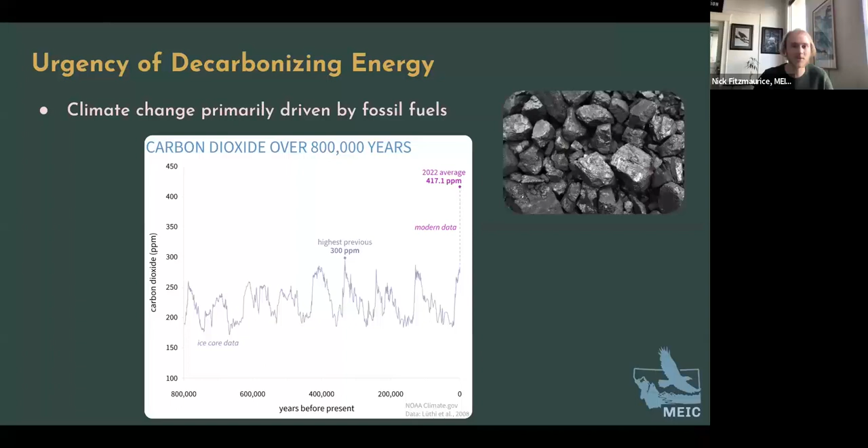So to start off, I want to talk about the urgency of decarbonizing our energy. As I'm sure everyone on this call is aware, we are in a climate crisis. We have unprecedented levels of carbon dioxide and other greenhouse gases in our atmosphere that are causing warming like we haven't seen at this rate in human history. And the primary driver of these greenhouse gases in the atmosphere are fossil fuels, specifically as burned for energy. But the exciting news is that we have technology readily available to switch out those fossil fuel energy sources while continuing to keep the lights on and keep a robust and reliable energy system. And that's what we're going to be looking at here today.

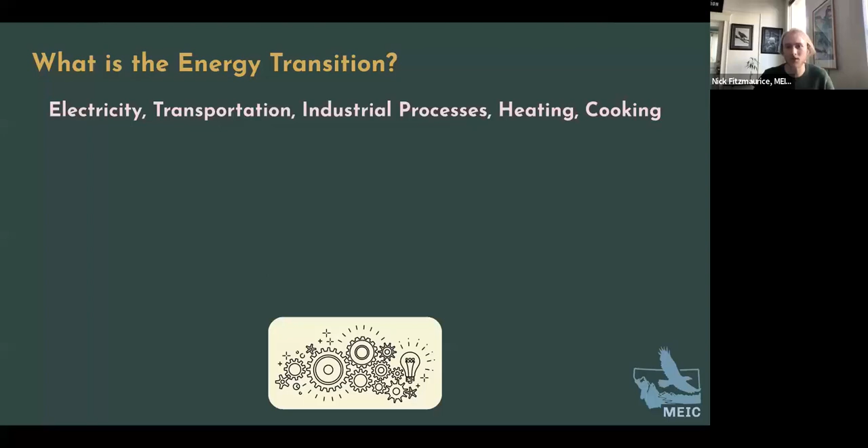So more specifically, what are we transitioning? On a broad level, there are a number of different parts of our energy system. We have our electricity, our electric grid, the transportation that's mostly on our highways and driving cars, industrial processes, and then residential and commercial heating and cooking. Currently, there are carbon-free sources in there, but we're very heavily reliant on fossil fuels of coal, methane gas, and petroleum to fulfill those needs. And what we're transitioning is fulfilling all those same functions, but with carbon-free renewable energy sources, and looking further into how we do that effectively.

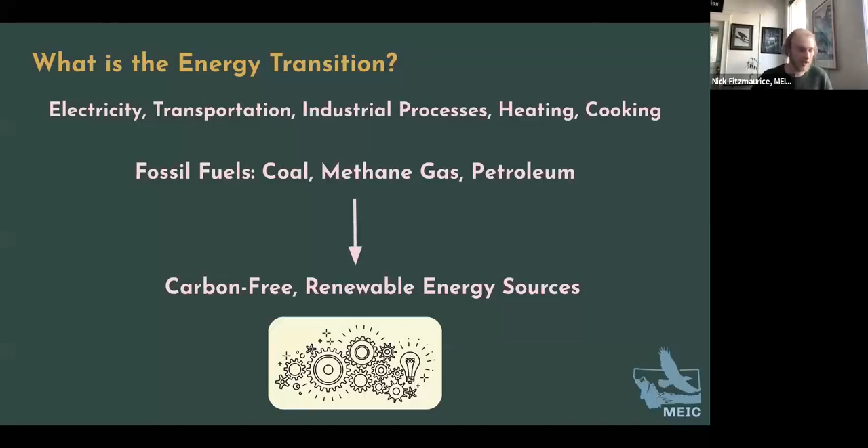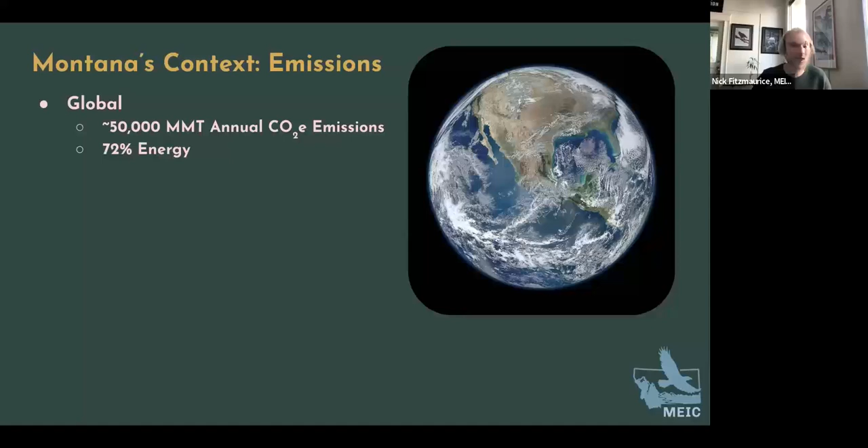I want to talk about where Montana fits into the context of climate change and greenhouse gas emissions. From a global perspective, this number is really hard to pin down, but anthropogenic greenhouse gas emissions, CO2 equivalent, is around 50 gigatons or 50,000 million metric tons every year. Estimates vary depending on how you do the calculation, but about 72% of those emissions are associated with energy.

If you look at the United States in particular, this graphic from the EPA shows point source emissions over, I believe, 25,000 metric tons annually. This shows the United States, by the EPA's estimate, has about 6 gigatons or over 6,000 million metric tons annually, and that percentage is also around 73% from energy.

Then Montana, if you go by the EPA's estimates, our slice of that is about 50 million metric tons, and being a more sparsely populated state, about 63% of that is energy. There's a big agricultural component.

But if you look deeper into the numbers, you have to realize that Montana also has influence regionally, nationally, as well as internationally, as an exporter of both electric power and also those fossil fuels of coal, methane gas, and petroleum, as was explored in expert testimony at this summer's Held v. Montana trial.

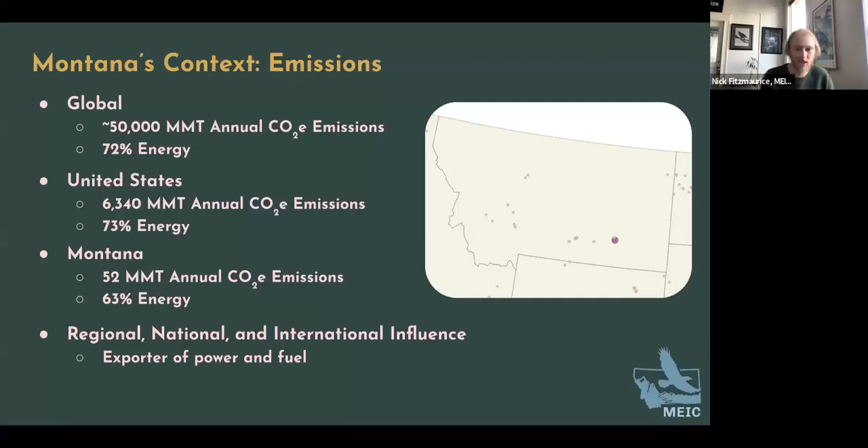When you do some of the calculations to look specifically at all the emissions that Montana is responsible for in those exports and fossil fuels moving through the state, we get to a number of about 166 million metric tons of carbon dioxide, and that's CO2 specifically, not looking at methane or other emissions, and that's only for energy. So in Montana, we have a pretty outsized impact on emissions, and that's something we want to address.

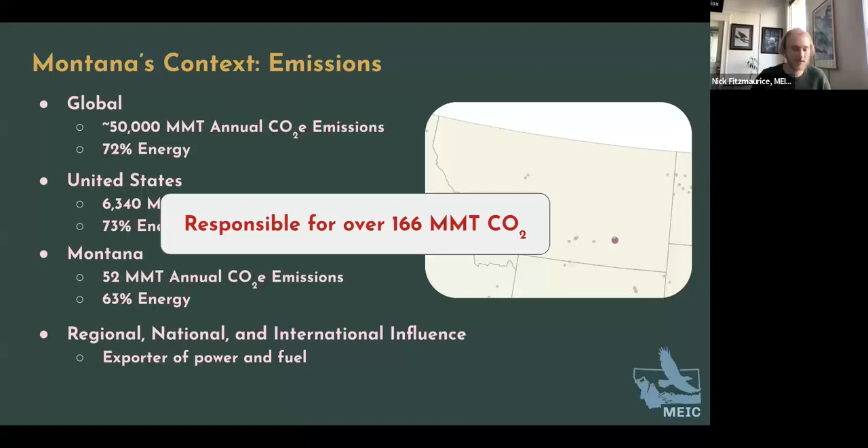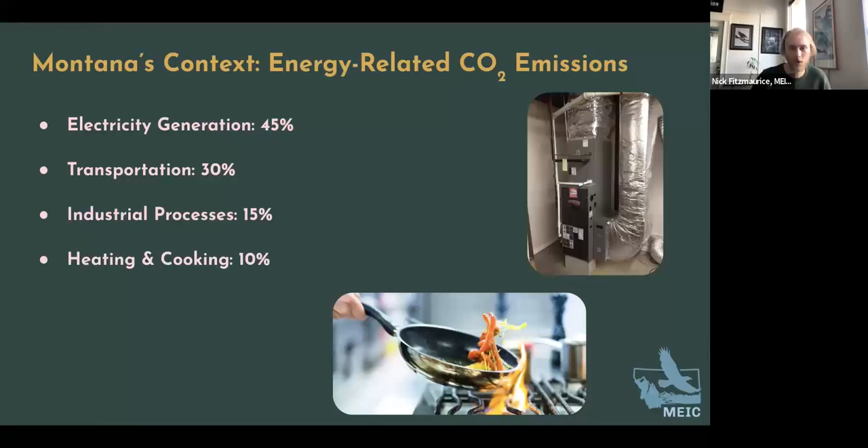Further looking at where Montana fits into things, I want to look at how the energy emissions are split between different pieces. Electricity generation is going to be the biggest contributor of our energy emissions at 45%. Transportation is about 30%. Industrial processes, and we'll talk more about what that is, about 15%. Then heating and cooking, that's methane gas directly hooked up to homes and buildings for our appliances, is the last 10% there.

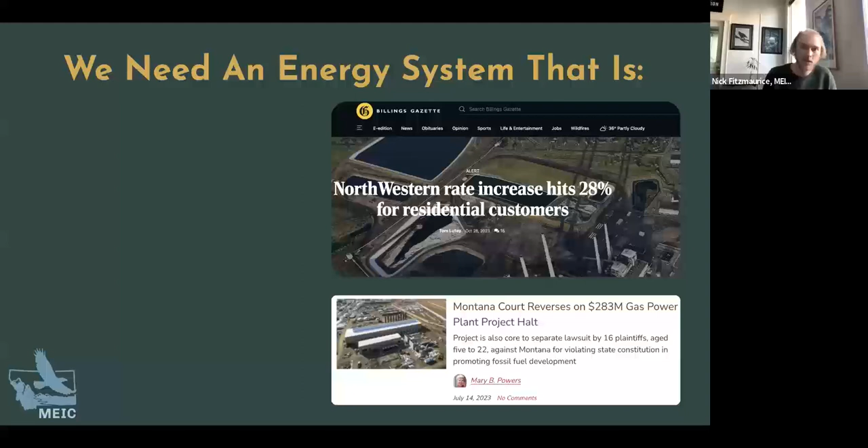So looking at where we are at currently, there's been a lot of issues and challenges. I'm sure most of you are aware of the expensive energy that we are purchasing in Montana. Northwestern Energy has been increasing rates astronomically, and they're just continuing to invest in expensive fossil fuels. What we're hoping for and what we need in Montana is a system that's affordable, reliable, equitable, and carbon-free, and something that can be implemented immediately.

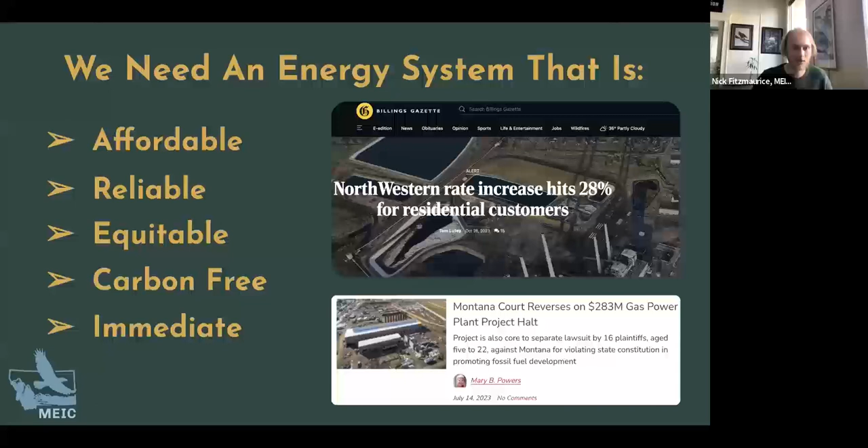The climate crisis is at our doorstep. We have only years, and maybe a few decades at the most, to get this right, and we need technologies that can start going into service right now.

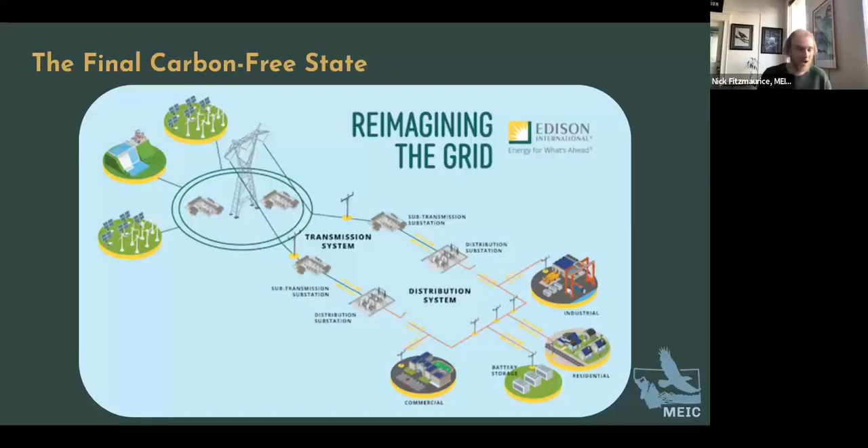So when we talk about the transition, there's the current state of what our energy system is like. It's very fossil fuel dependent, but we definitely have those pieces of carbon-free energy. We're moving towards a final state of fully clean, carbon-free energy that includes a number of efficiency measures as well as demand side management and other things, but being able to run the energy system entirely on carbon-free energy. What's important to note is that current state we have and that final state we're envisioning are both viable and technologically achievable, but the hardest part about getting there is the getting there.

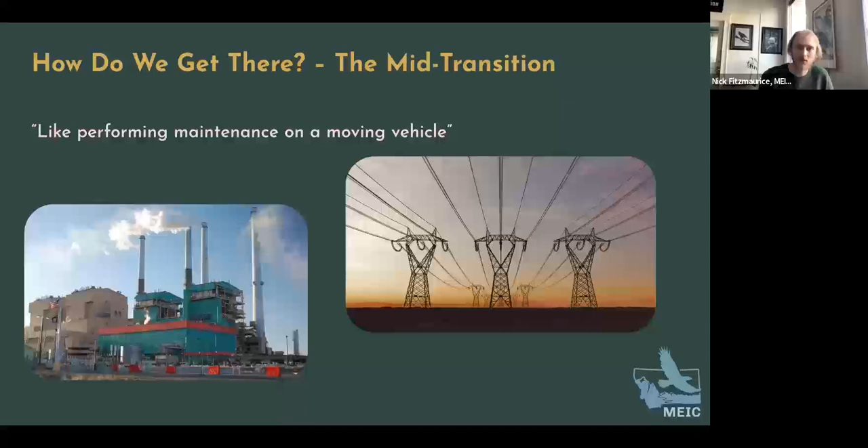I like this quote: this energy transition is like performing maintenance on a moving vehicle. The electric grid is, by some people's remarks, the largest machine ever built, and it's dynamic, it's always running, and it's a challenge to shift from the current fossil fuels to a future of fully clean energy while keeping everything running and affordable and reliable. That's what this transition is all about.

So what I'm going to dive into here is a number of the components of this energy transition, and they all fit together. It's hard to say which comes before the other because it's interrelated. We'll talk about energy electrification, demand side management and efficiencies, electricity decarbonization, transmission infrastructure, and then regional power sharing. Those are the main topics I've broken it out into. There's other related things, but this gives an idea of what we're working with.

In all these efforts, I also wanted to touch on what the funding opportunities are. This is going to require investment to get this transition underway successfully. There's definitely expenses of building out this infrastructure, but it's also worth noting that there's expenses of doing nothing, and costs of the current damages caused by fossil fuels. But to really get these things underway, we need to have the right funding mechanisms.

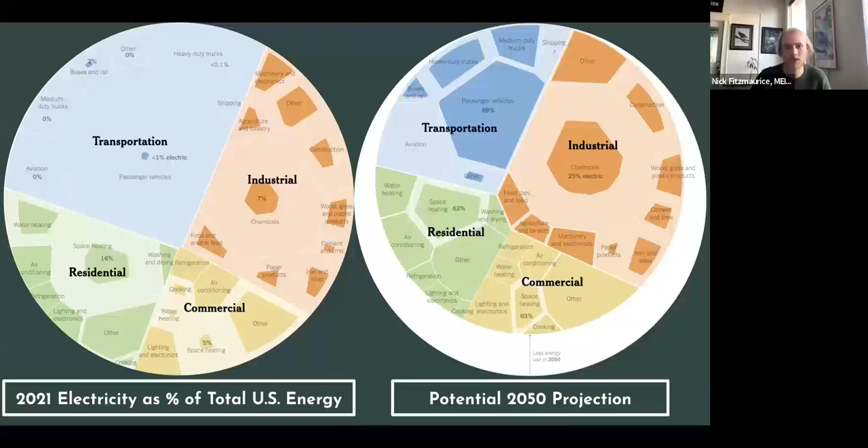That graphic on the left shows total energy consumption in these different sectors. You can see the filled in portions are the amount that are currently electric, and the one on the right is showing the amount of those that, in a certain projection, would be needed to completely decarbonize the energy system. You might be wondering why we need to electrify. The big reason is that fossil fuel combustion for energy is going to inherently have greenhouse gas emissions. These are carbon-based fuels, and when you burn them, carbon dioxide and other pollutants go into the atmosphere. But what we know about electricity is that we can generate it in a number of ways, and whether it's carbon intensive or carbon free, it'll act the same.

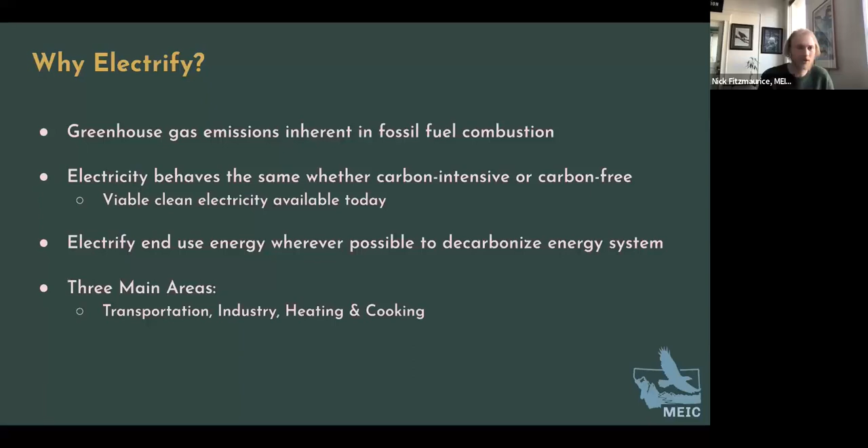We have at the ready viable clean electricity technologies that can be implemented in the time frame needed. So the idea is, wherever possible, we can electrify our end use energy consumption so that we can then make that electricity clean and continue to run all our energy needs. I'm going to talk about three main areas: transportation, industry, and then heating and cooking.

First off, transportation, and the one that is most forefront in the media is electric vehicles. That's a big part of transportation electrification, but there is more to the story. I would note that electric vehicles are great for a number of reasons, one being that powering our cars by gasoline and diesel is really an inefficient use of the energy stored in those fuels. But when you use electricity, that's just a much more efficient use for transportation.

But the other pieces that we also need to look at are opportunities for public transportation, making that both accessible and electrified. And then the final piece here is shipping and cargo and all these different vehicles that move our goods around. We'll talk more about the hard to abate sectors - some of these, especially aviation, are going to be really challenging things to address and make electric. But there's other ways that those can be decarbonized as we're looking at energy decarbonization.

So then industry - I'm going to talk about what we have in Montana. Specifically, we have 4 petroleum refineries that collectively, by the EPA's numbers, contribute about 5% of total emissions in the state. Three of them are located in Billings or in and around that area, and 1 in Great Falls. These refine petroleum for fuels, but also for petrochemicals, so they can be challenging. There's a lot of processes that require direct heat in the refining process, and that can be electrified, but there's also other emissions that just need to be curtailed in other ways.

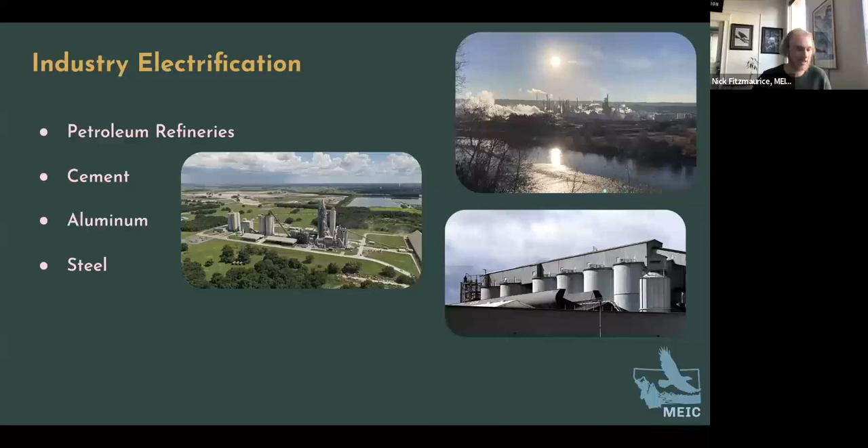Those facilities account for about 2 or 3% of emissions in Montana. We had an aluminum smelter that also used fossil fuels on site that closed in 2009 up in Columbia Falls. And steel manufacturing is a big industry, but not in Montana, so we are not looking at how to decarbonize that in this state.

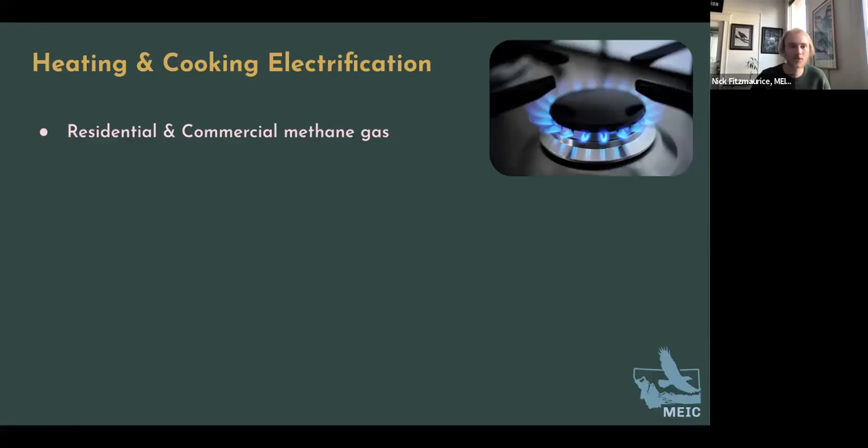And then finally, our residential and commercial heating and cooking. There's direct methane gas hookups to a lot of buildings for heating and cooking, used in stovetops, boilers for water, and also for space heating. There's opportunities to swap those out for heat pumps, which are great for heating. They can work for both water and space, and basically move heat around using electricity.

It's highly efficient. Normal or traditional methane gas or even electric heating applications have to use a lot of energy to heat up air. But what's great about heat pumps is that they just move the heat around, so it's a lot more efficient.

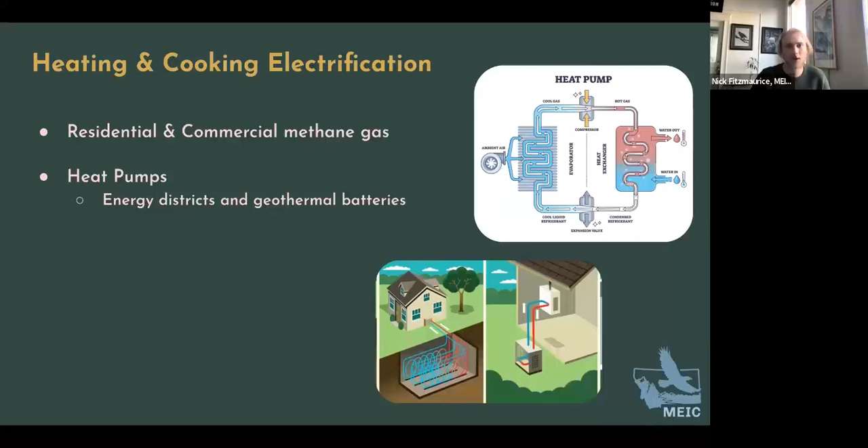There's some cool applications of those, whether it's energy districts where you share heat energy between neighboring buildings, or geothermal batteries where you store that underground using the ambient temperature of the earth for storage. So there's a lot of opportunities in heating, and there's also in cooking.

Instead of methane stoves, you can use electric induction stoves. Those are great because they still have a lot of the performance features that you'd want with your stove, but you don't have the climate impacts, but also the health impacts of having burning gas in your home. And we're learning a lot more about all the pollution associated with that.

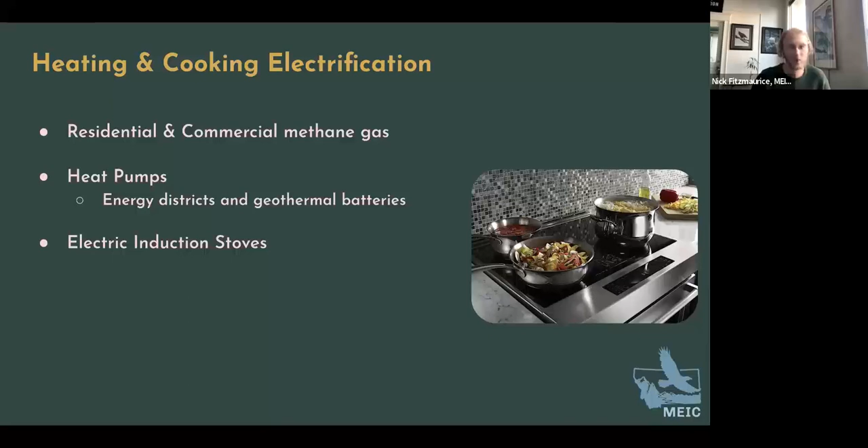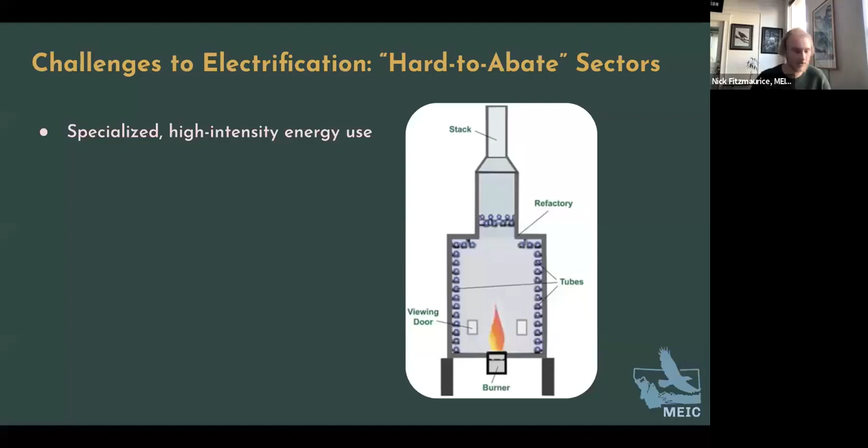Like I mentioned, there's hard to abate sectors. In industry, there's often specialized high intensity energy use. This is a graphic from a petroleum refinery, showing how there's a lot of heating elements to parse out the different pieces of crude oil. You have to reach really high temperatures that can be challenging with electricity, but there's kind of burgeoning technologies for that, and also some other opportunities, but that is still an energy use that can be decarbonized.

And then another hard to abate thing that starts to get out of energy, but when we talk about cement, there's both energy elements, but also chemical elements to the emissions. There's going to be a kiln that does burn fossil fuels on site, and we can find ways to decarbonize that heating process, but also the calcination of the product just in itself releases carbon dioxide. So that's beyond energy, but also something that needs to be considered.

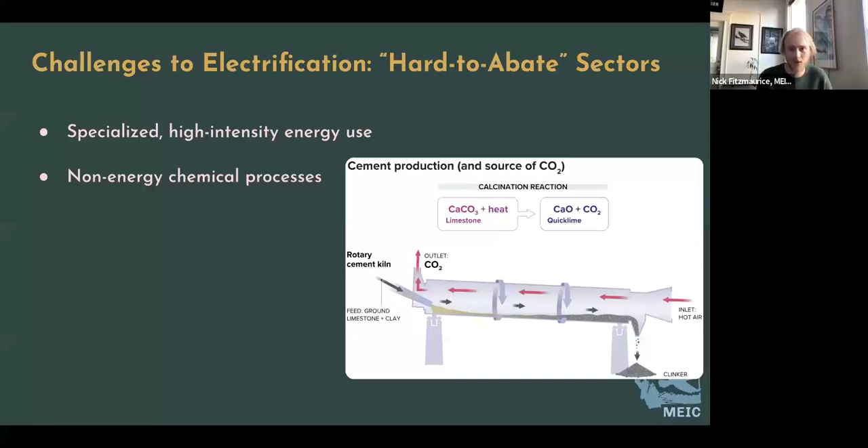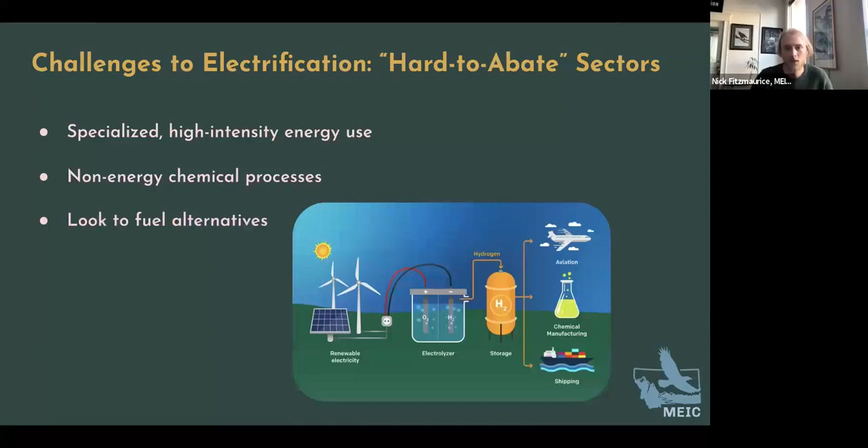When we are talking about these things that are going to be challenging to electrify, there's also other opportunities for carbon-free fuels. There's a lot of talk about hydrogen, and I'll talk a little more about that, but making sure that if we are looking to alternative fuels, we're paying attention to the impacts of those fuels and making sure that they are actually clean.

So this next piece is going to be demand side management and efficiencies. Where this comes into play is as we are electrifying all these different pieces of energy that currently use fossil fuels as an end use, there's going to be an increase to the overall demand on our electricity system. There will be a need to build out a lot more generation capacity, but there's also opportunities to bring down that demand using these tools that are available to us.

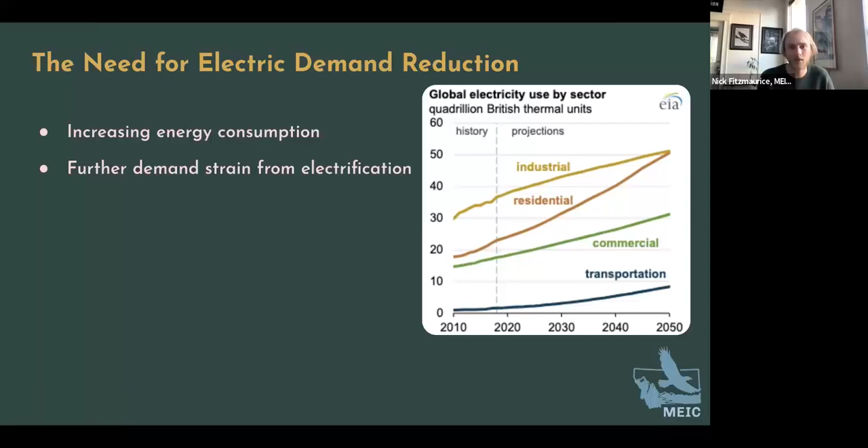So first off, talking about what these efficiencies look like, starting with household appliances, you can look to Energy Star as a great rating system that will certify that appliances you use in your home, be that washer machines, dishwashers, dryers, refrigerators, any appliances that plug in on your countertop, are going to be as efficient as they can be. That's going to save both energy use and money at the end of the day on your electricity bills.

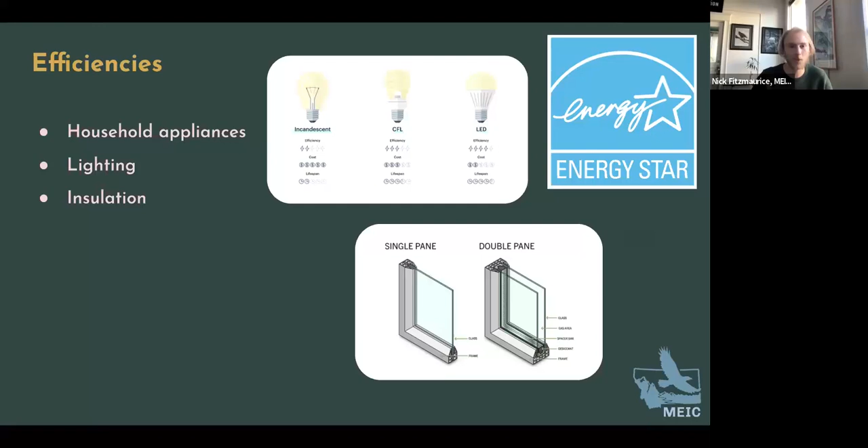Another common one is lighting, and we see that LED lights are far more efficient than previous alternatives. Then insulation, this comes in a number of forms. There's walls and roofs, but also easier to address can be your doors, making sure they're not leaking and have good insulation, and also windows, making sure you have insulating windows of double or triple pane that can really hold in the energy, so you don't have to continue pumping energy into your home just to keep it warm when you can just hold it at that temperature through efficiencies.

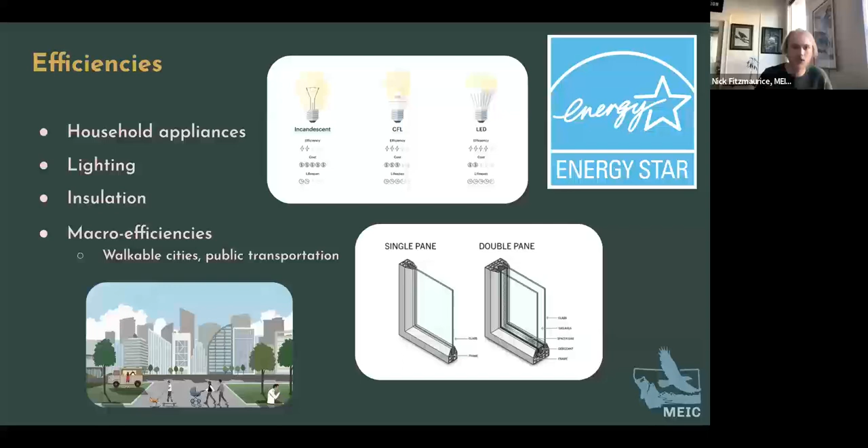And then the last point I wanted to mention with efficiencies is kind of more on a macro scale, thinking about how we design our communities and cities to be more efficient, to require less transportation, to be more walkable and have more connection with public transportation options. So overall, we're just going to be using less electricity. There's also IRA rebates and tax credits for efficiencies, so I'd encourage you to look into those.

And then getting into demand side management, this is more on the utility side of things. These are strategies to disincentivize electricity use during peak periods. There's a couple ways you can do this through dynamic real-time pricing, where you can just have less electricity used in peak use periods, oftentimes the evenings.

There's also curtailment service that utilities can offer to larger customers. An example where this would work is crypto mining outfits that use a really large amount of electricity. Utilities can have a contract where during these really high peak events, they agree to not draw power and curtail their use, because that's non-essential electricity use. So instead of building out a bunch of generation infrastructure to meet that peak period, we can just level out the demand. I have a graphic here showing a couple of these strategies.

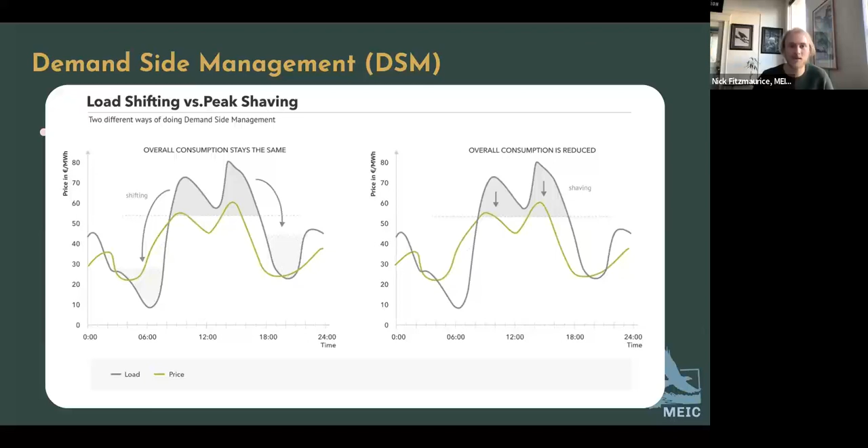And a final note on demand reduction, efficiency from the energy transition: if we swap the current fossil fuel intensive infrastructure for carbon-free renewables, there's also energy savings from the fact that we're no longer needing fuels. All our fossil fuel electricity generation requires coal, gas, or sometimes petroleum. But when we switch to renewables, there aren't any fuels, there are natural processes that keep those running. So all the energy that currently goes into producing these fossil fuels is no longer needed, and all the energy we generate can be used for what we need it for in the end.

Another point here is that as we are generating more using distributed energy sources, like rooftop solar as the main example, we're going to be using that electricity near where it's produced in our homes. There's additional savings to be achieved just from not having to transmit that electricity over long power lines that will lose some of it.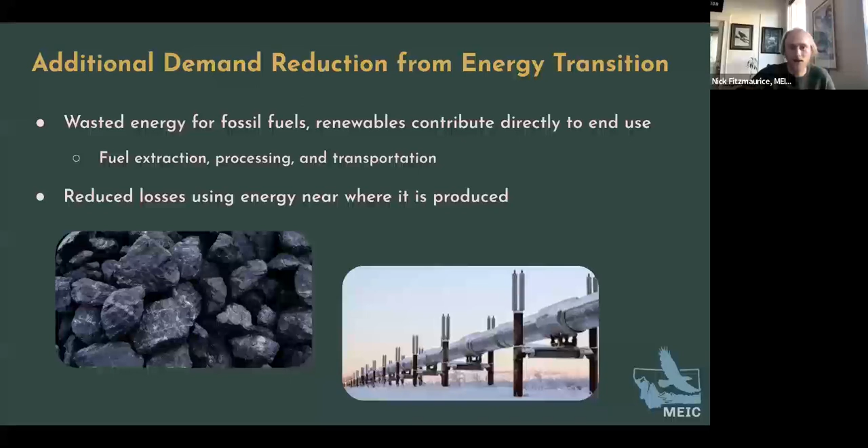So the next piece here is electricity decarbonization. I talked about making the energy we use all electric, and then reducing the overall demand we have on that system. But to really decarbonize the electricity we're using, we need to look specifically at our generation infrastructure. The main things we're going to be talking about here are wind, solar, and storage. There are other pieces, but we really have to be mindful of how we're doing this and how we're transitioning from the current fossil fuels we have.

And a big part of that is how we're bringing our communities along that have been historically dependent on these fossil fuels. A big example of this is the Colstrip community out in eastern Montana that is supported by the Colstrip power plant.

It's the largest point polluter in Montana, a coal power plant. And there's already some funds that have not been used, but Puget Sound Energy and Avista have contributed to that. There are some of the joint owners, utilities that own part of that plant. And then also federally, there's some money available to help with the community transition, economic transition, and retraining of the workforce. So we need to keep investing in opportunities like this, and also be mindful and bring these people along.

I want to note that while there's funds available for Colstrip, there's other communities in Montana that we also have to be supportive of. The Crow Reservation has the Absaloka mine on their land, and the Roundup community has Signal Peak mine, and all these different fossil fuel dependent communities we need to bring along.

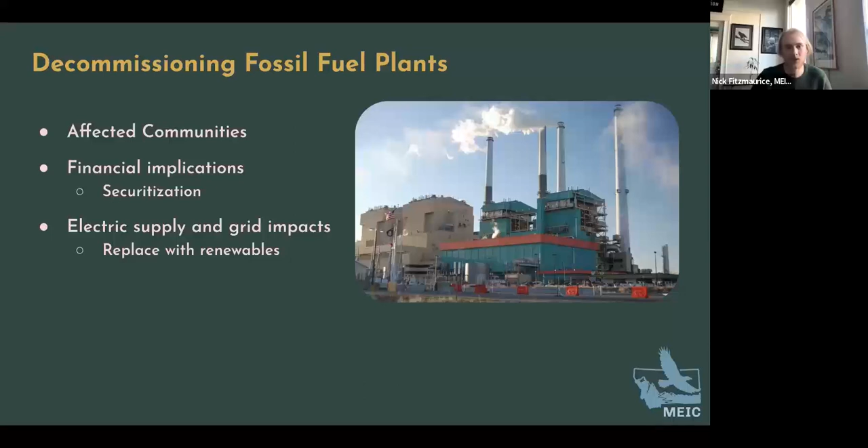And then this other piece is just making sure that as we take these offline, they have been providing a service to the electric grid and Montanans in creating electricity. We have to make sure that we are supporting the grid and replacing that lost generation capacity with carbon-free sources.

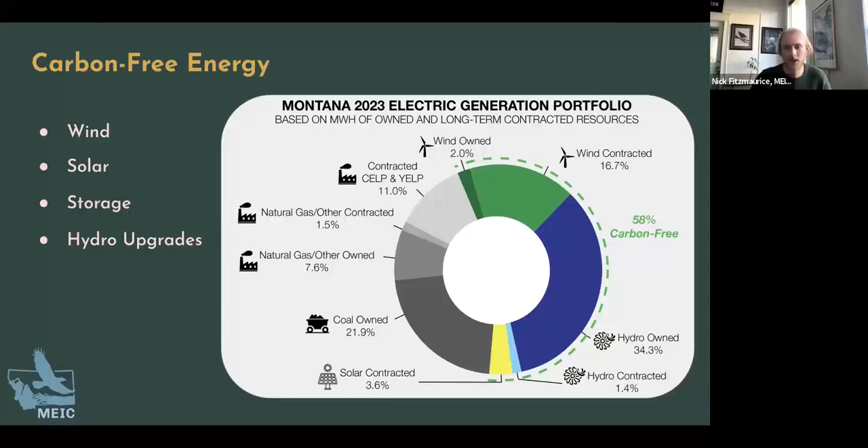Another piece there is there are opportunities on our existing hydro resources to retrofit and upgrade the generation turbines so they can keep generating more electricity for us.

I want to touch on some technologies that enable this transition. There are definitely a lot of people that are nervous about switching the way we've been running our electric grid to this new way that is just going to be different. It's doable, but it's not the same that we've been doing for the last many decades.

So there's a number of technologies that can help that along as we are shifting our paradigm from these large centralized generating thermal assets that use coal and gas to establish the grid, to more having these renewables everywhere, but also there's this opportunity for distributed energy resources. Those are just going to be things like rooftop solar or home batteries that are really distributed and not centralized in any way. And I believe there's also a number of incentives for building out your own distributed energy resources. Solar is an especially accessible one, but these are just from IRA funding again.

And another cool thing that we start to be able to access with DERs is virtual power plants, which is just a coordination of all these different resources to dispatch energy between batteries, between households, and really run a dynamic grid in a way that we're able to in the 21st century.

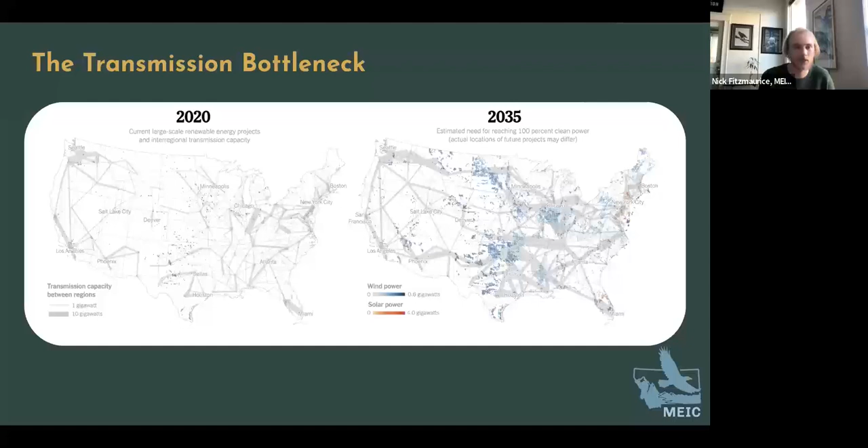Another graphic here just shows that we're constricted by the current amount of transmission we have. There's these interconnection queues where proposed projects, for a number of reasons, have not been developed yet, and a large part of that is there's just not the ability to connect them to the grid. We see so much solar, wind, and storage proposals - these are in gigawatts. We, in a household, would use a kilowatt, so this is a much larger unit, but just showing that transmission is really important to be able to unlock this renewable carbon-free potential.

I just want to touch on what some of these roadblocks are. One big thing is just educating communities that are impacted and being able to work with communities so that building out new transmission can be a joint effort and not adversarial, and that can be a real challenge. There's also this challenge of interstate coordination where these transmission lines are national, they are kind of between states, and who is going to take the lead on that? How do different states work together? And another big piece of that is who is going to pay for them.

That's a big issue we see with the Bonneville Power Administration, BPA, in the Northwest - just needing to build these projects, but how are you going to recover the cost? Who's going to pay? And all this, along with permitting, can make it a really lengthy process and challenging to expand our transmission. But while we're thinking about these kind of bigger projects, there's also projects we can be working on currently to really bolster the amount of energy that can move through the current electric infrastructure.

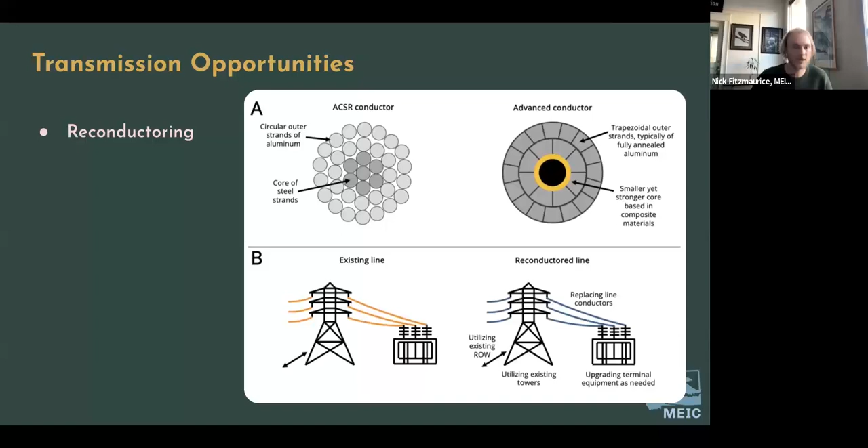A big one of these is reconductoring. That's swapping out the lines that are on these big transmission systems just so they can move more electricity at a given time. There's a lot of benefits that can be gained from this, and we're really hoping that this continues to be a big focus.

And another piece here is this idea of grid enhancing technologies. There's a lot of things that might fit into this, and it's something that's really been picked up in Europe for over a decade now - just more advanced ways to monitor and manage how we're moving electricity through the grid.

A big part of that is just being able to understand the temperature of a line at a given time, because a lot of limitation is placed on how much energy can move through the transmission system based on extreme events and how much electricity would overheat the system. But if you know at a given time the temperature of the lines, you can shift the amount of power you're moving. During events, if the wind is blowing, you'll have cooler lines and you can move more power. There's lots of other pieces there that let you get more out of the infrastructure we already have, and that's really cost effective.

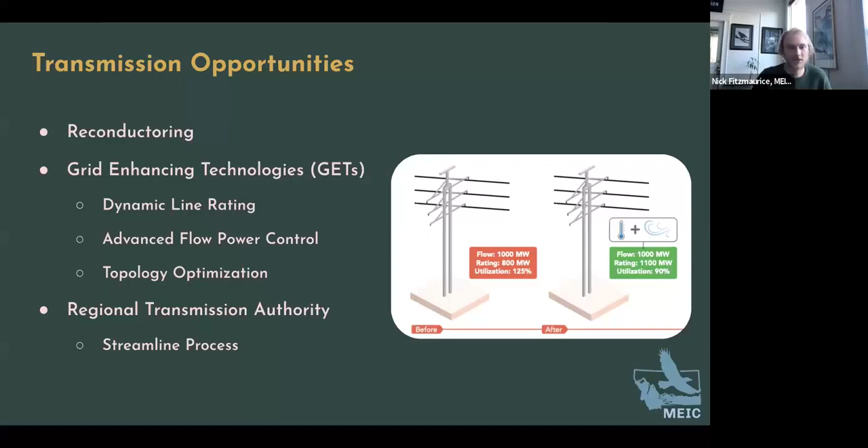And the final piece for transmission opportunities—I'm going to get more into power sharing shortly—is a regional transmission authority. There's one of these in Colorado as well as New Mexico. It's a state body that can really help coordinate this process and streamline building out the transmission capacity that's going to be needed in this energy transition.

So now we're on this last piece of the puzzle, regional power sharing, and this goes closely along with transmission infrastructure—we're going to be moving electricity from where it is available to where it is needed. That's kind of a reciprocal relationship between neighboring states and neighboring communities, so that we can use these renewable energy resources where they're available for the communities that need them.

But what's exciting is there is momentum in this space of markets moving power from where it's available to where it can be used. Currently, Northwestern Energy is part of the Western Energy Imbalance Market. They joined in 2021; this has been around since 2014. While this is limited in functionality—utilities are only trading power an hour ahead so they can meet real-time energy needs—there's a lot of limitation in price volatility when you're only able to trade your power an hour in advance.

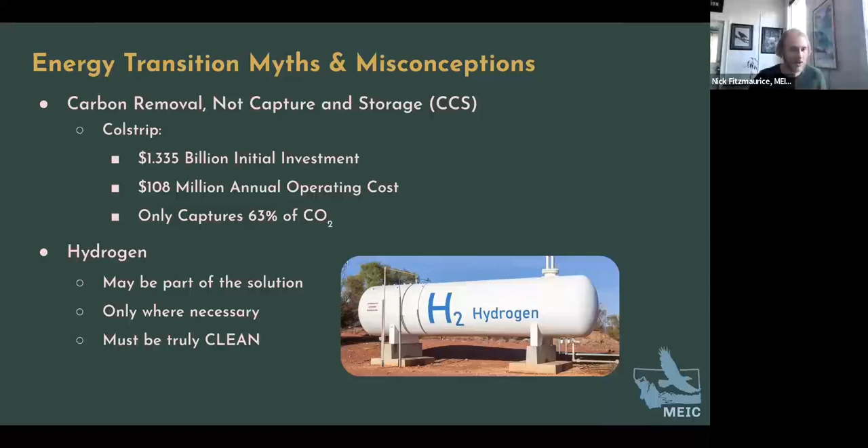And then the final thing, I'm not going to talk too much about nuclear, but myself and Anne Hedges have been traveling to different communities to talk about where we're at with nuclear energy in Montana and the challenges there. We have another event coming up, our final one in Great Falls on Monday, so if you're around there will be more information about that. But the big takeaway is that it's really an expensive, risky, and unproven technology. It's not something that's viable today to solve the climate crisis in an affordable and timely way that we need for this pressing issue.

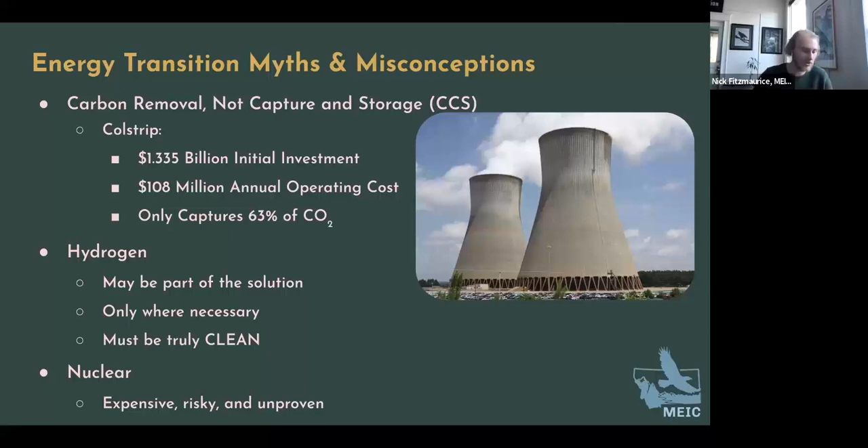And then finally, just some opportunities to pay attention to. We do have most of this technology available to us, but there's no reason to hesitate to start the work in this transition, and really we are well underway. We've seen the pace of renewable clean energy development just far outpacing fossil fuel development, and that transition is happening right under us.

But some pieces are going to have to continue developing to get to the end here and fully decarbonize energy. A big one is going to be our energy storage. There's a lot of utility investment in short-term storage, in the 2 to 8 hour range, with 4 hours being pretty standard. But we also need more opportunities for long duration battery storage that allows us to capture energy when it's available from wind and sun and redispatch it and hold onto it for a longer amount of time. The other thing I mentioned is industries that need to achieve really high temperatures, and there are some developments on industrial battery storage that can specifically reach those temperatures.

And then some other things to keep an eye on that could be a part of this equation going forward. Enhanced geothermal is a technology where I believe the first proof of concept project came online pretty recently, being able to cost effectively tap into a geothermal resource in a lot of places where historically we haven't been able to.